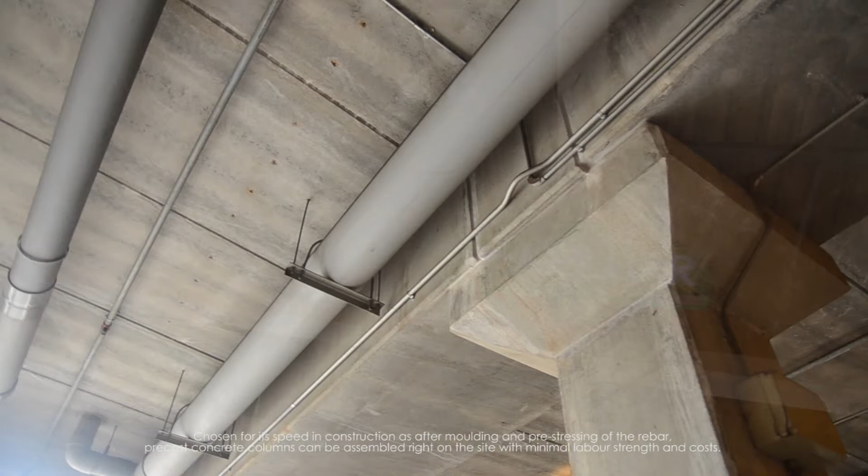Chosen for its speed in construction as after molding and pre-stressing of the rebar, precast concrete columns can be assembled right on the site with minimal labor strength and costs. Sizes of the columns can be preset into various sizes that are needed.

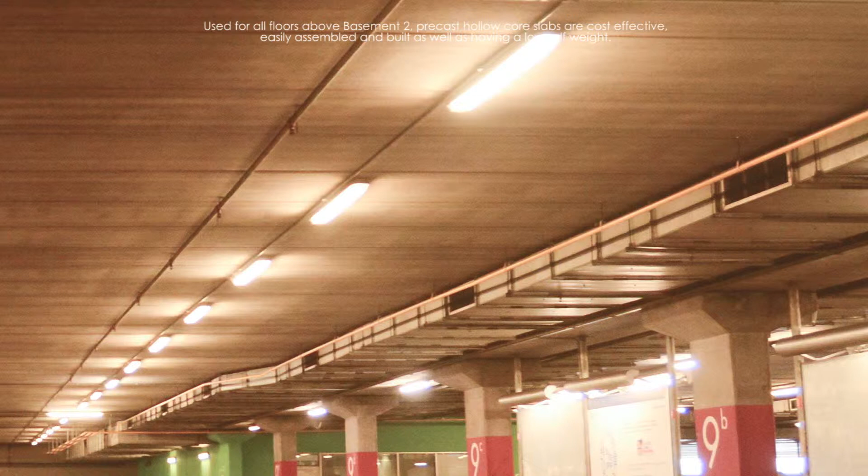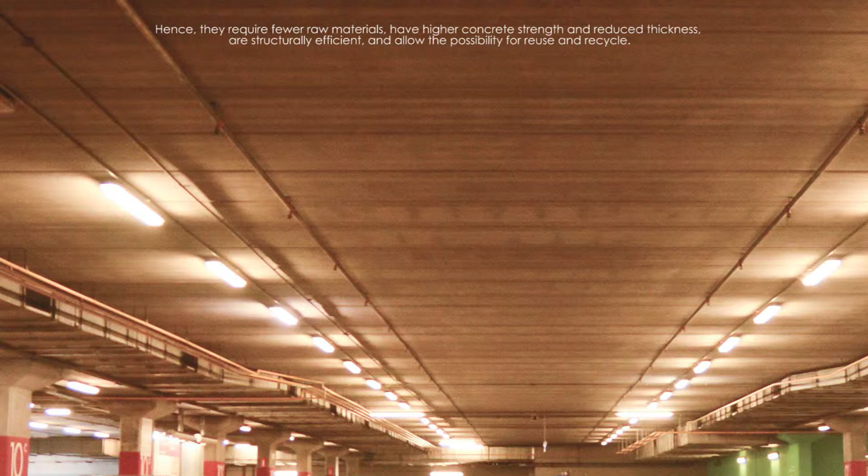Used for all floors above basement 2, precast hollow core slabs are cost-effective, easily assembled and built, as well as having a low self-weight. Hence, they require fewer raw materials, have higher concrete strength and reduced thickness, are structurally efficient, and allow the possibility for reuse and recycle.

Precast hollow core slabs are widely used due to its heavy weight capacity, exceptional fire resistance, lower self-weight, good acoustics and thermal insulation, cost-effective construction solution, design flexibility, and many more.

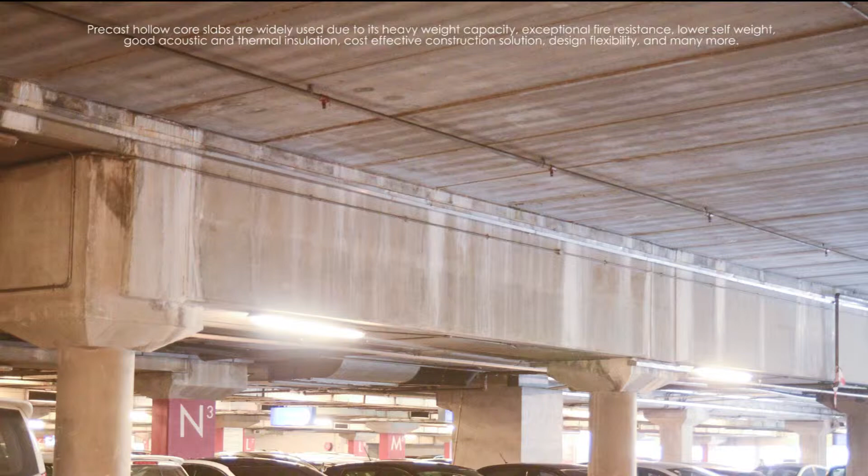The basement level of the IKEA store is made up of reinforced concrete flat slabs. Floor slabs are cast in situ with reinforced steel bars, which is known as rebars, as reinforcement and formwork, after which concrete was poured into the formwork and left to dry. Thanks to its ease of construction, reinforced concrete flat slabs are a popular choice in industrialized building systems. These slabs do not need grouting in order to combine them together.

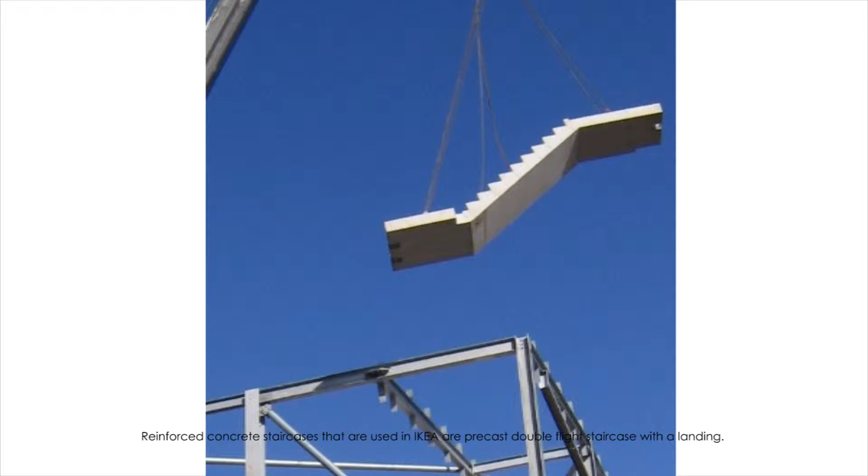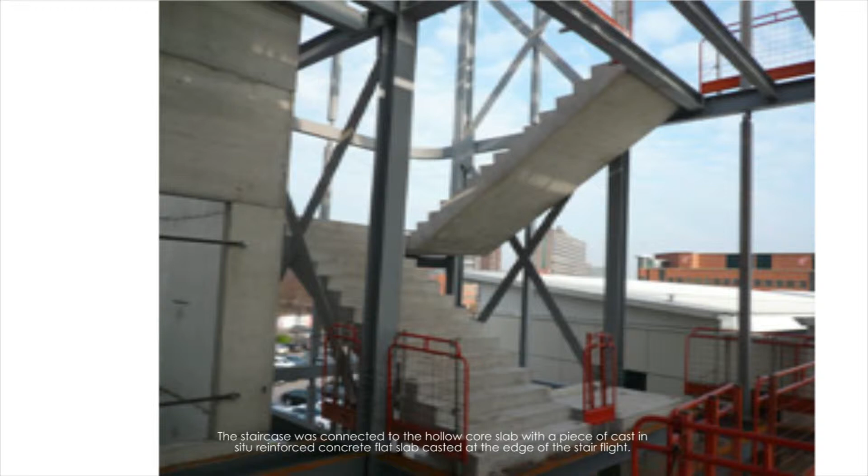Reinforced concrete staircases that are used in the IKEA store are precast double flight staircases with a landing. The staircase was connected to the hollow core slab with a piece of cast in situ reinforced concrete flat slab cast at the edge of the stair flight. This type of staircase was chosen for IKEA as it requires little assembling time.

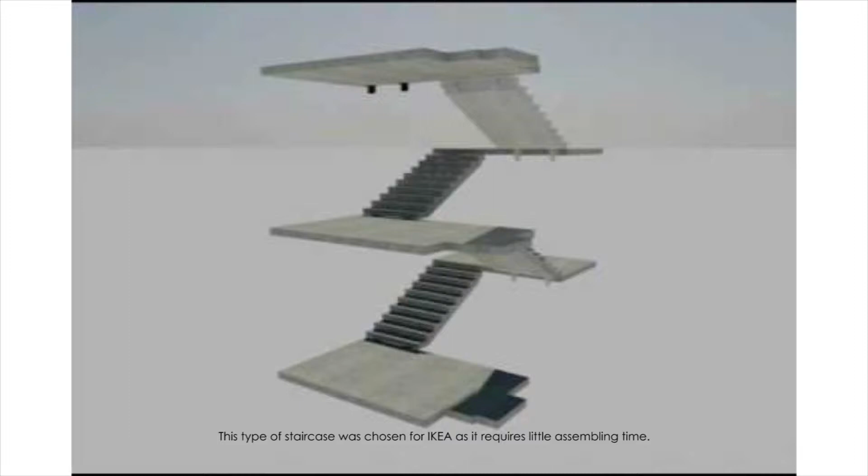Also due to its easy and fast assembly, precast steel roof truss was used for this building, as it is lightweight for transportation. Steel members of the roof truss were pre-made off-site, while the individual parts are bolted and welded on-site after transportation.

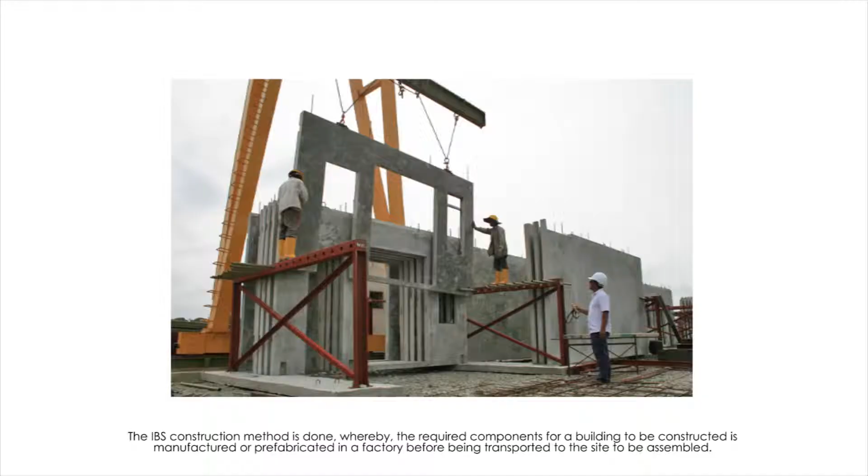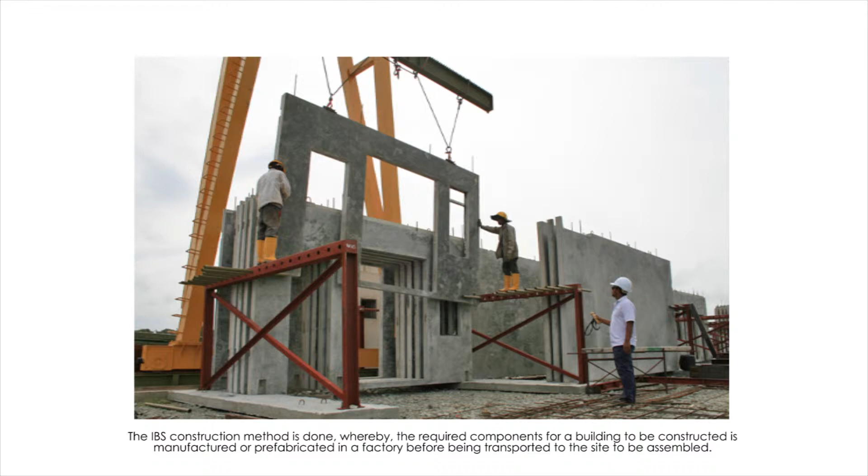The IBS construction method is done whereby the required components of a building to be constructed are manufactured or prefabricated in a factory before being transported to the site to be assembled. The advantage of the IBS is that it speeds up the process of construction and at the same time it reduces the overall cost of the project.

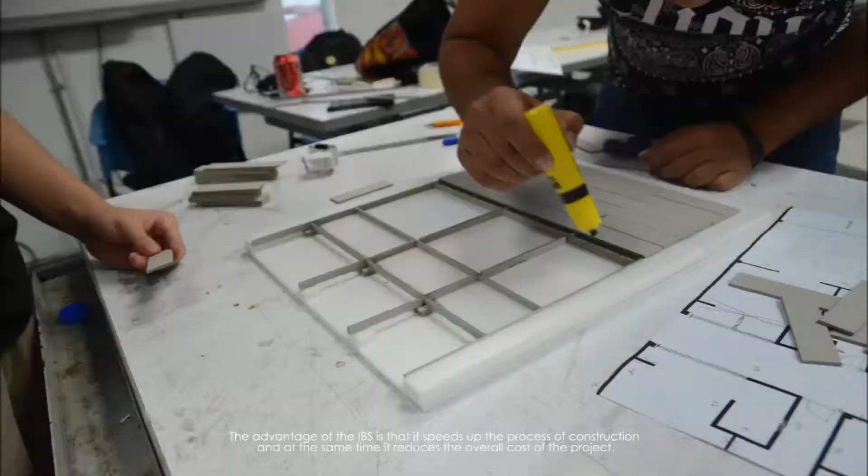The building that we use to demonstrate the example of construction using IBS components is Rose Bay Apartments, located in Sydney, Australia. This building uses the traditional method of building construction. We have modified this building in order to show the construction of this building using prefabricated concrete components.

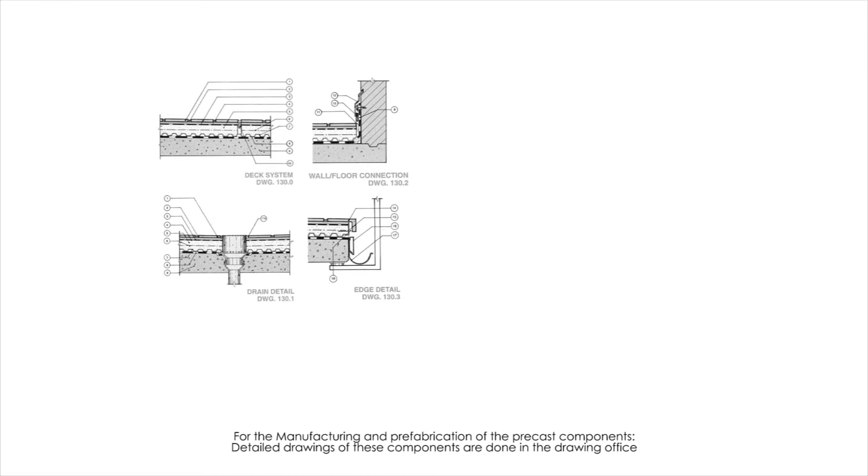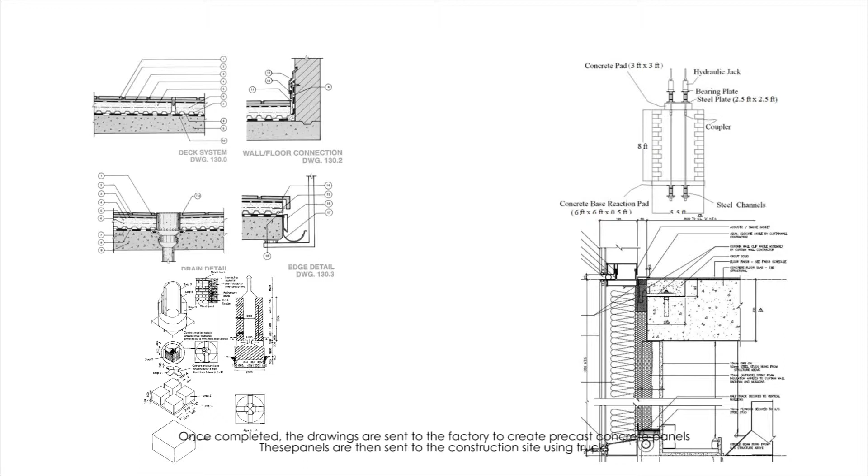For the manufacturing and prefabrication of the precast components, detailed drawings of these components are done in the drawing office. Once completed, the drawings are then sent to the factory to create precast concrete panels. These panels are then sent to the construction site using trucks.

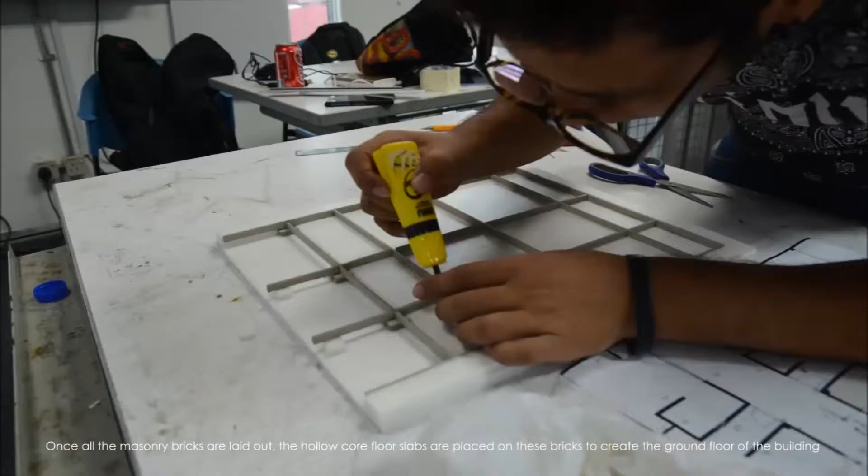For the foundation of the apartment, the IBS construction begins by laying out two layers of masonry bricks along the layout of the load-bearing walls. Once all the masonry bricks are laid out, the hollow core floor slabs are placed on these bricks to create the ground floor of the building. After all the slabs have been laid out, gaps between these floor slabs are closed using a layer of cement which serves as an adhesive to help prevent leakages.

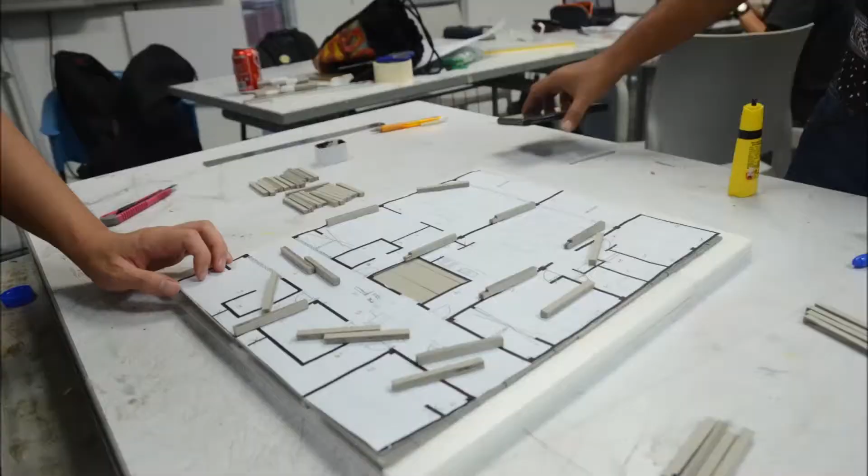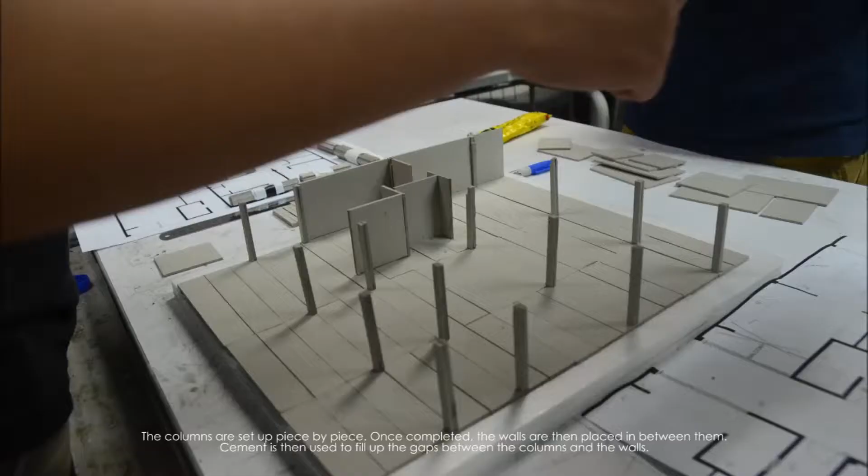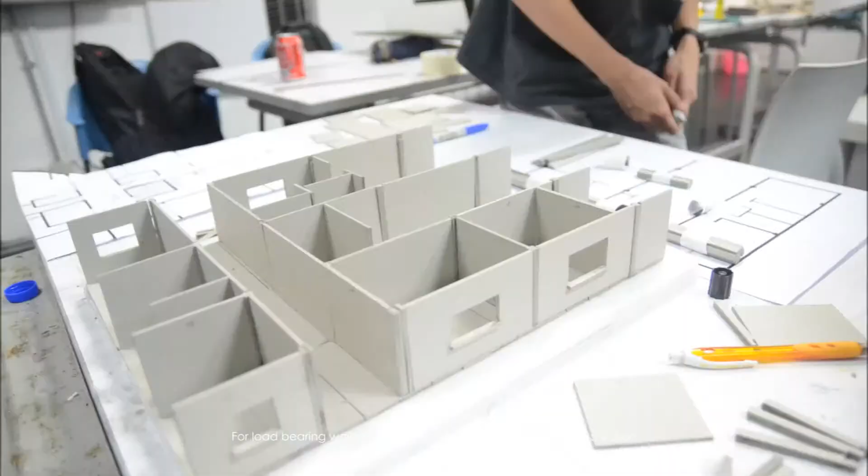After the floor slabs are completed, precast columns are installed, which is then followed by the precast walls using a crane. The columns are then set up piece by piece. Once completed, the walls are placed in between them. Cement is then used to fill up the gaps between the columns and the walls for the load-bearing walls. Concrete of grade 35 with the ratio of 1:3:5 is used.

Once all the walls and columns are installed, the beams are then placed on the walls and columns to provide support for the weight acting on the ground floor.

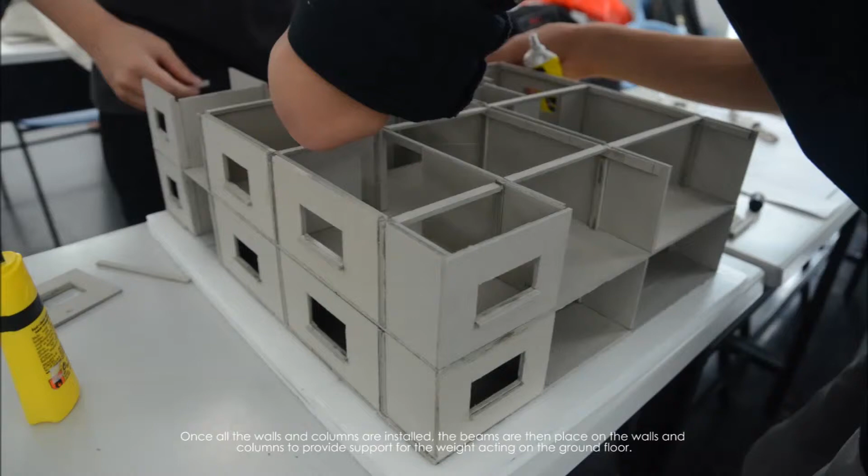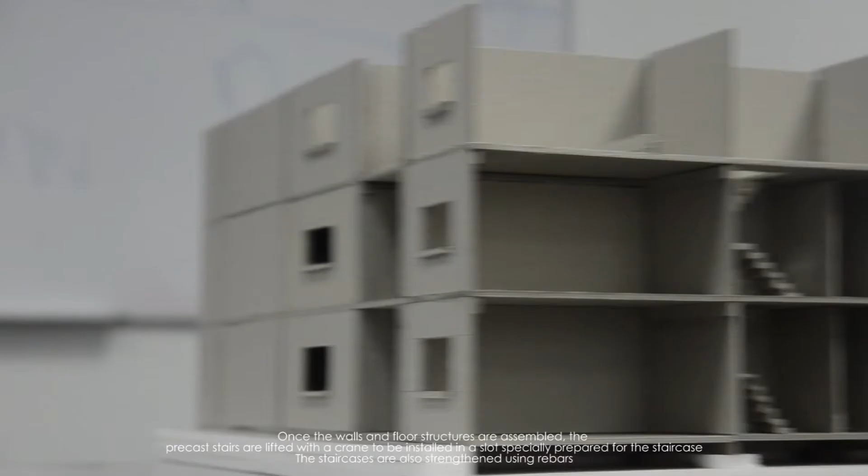Staircases are made of precast concrete in the factory before they are transported to the site for installation. Once the walls and floor structures are assembled, the precast stairs are lifted with a crane to be installed in a slot specially prepared for the staircase. The staircases are also strengthened using rebars.

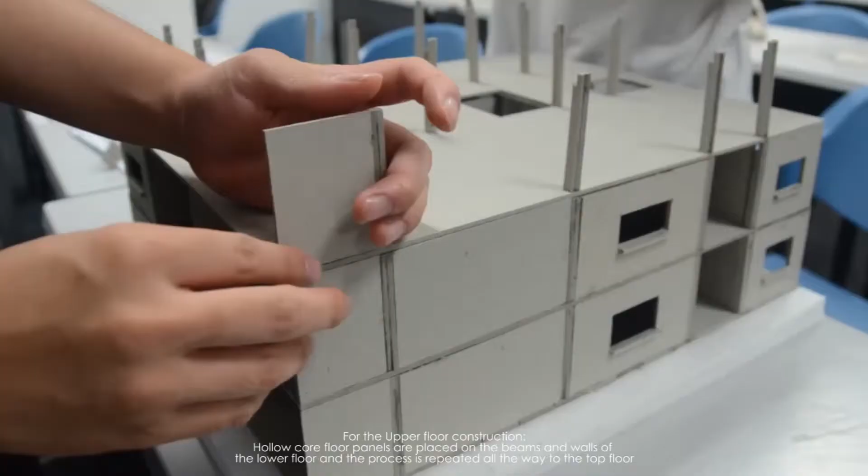For the upper floor construction, hollow core floor panels are placed on the beams and walls of the lower floor, and the process is repeated all the way to the top floor. Hence, through the IBS construction method, construction is fast and smooth with little issue.

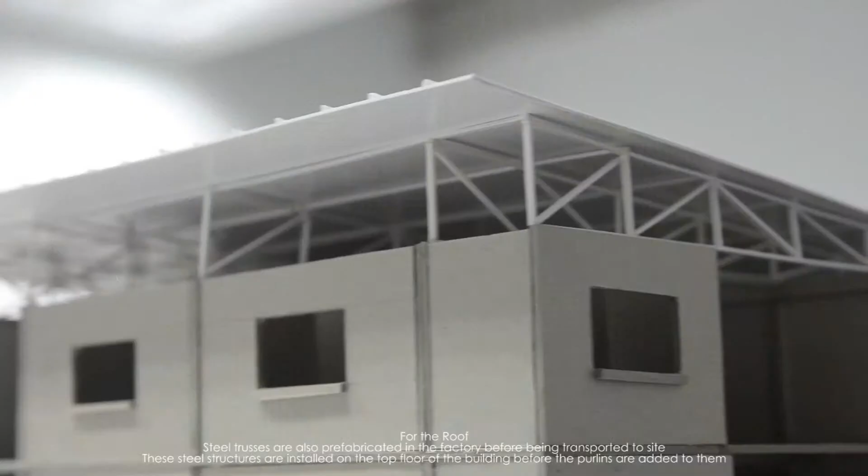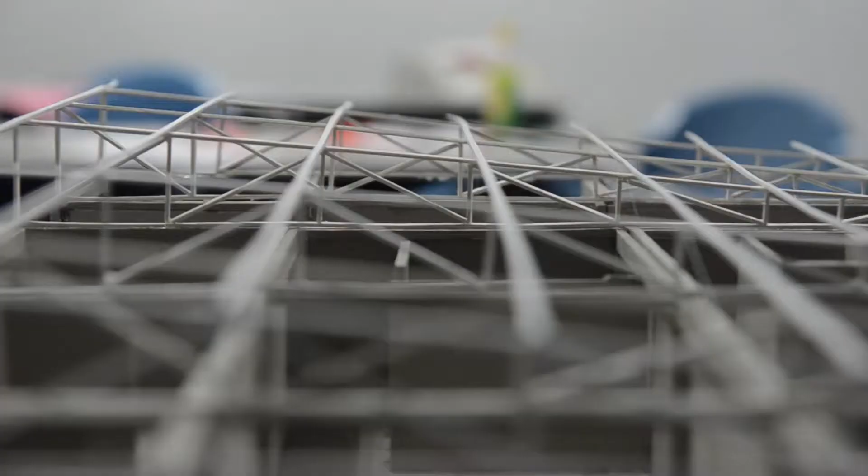For the roof, steel trusses are also prefabricated in the factory before being transported to site for installation. These steel structures are installed on the top floor of the building before the purlins are added to them. After that, the galvanized steel roof is added on top of the trusses and purlins, thus completing the construction of the building.

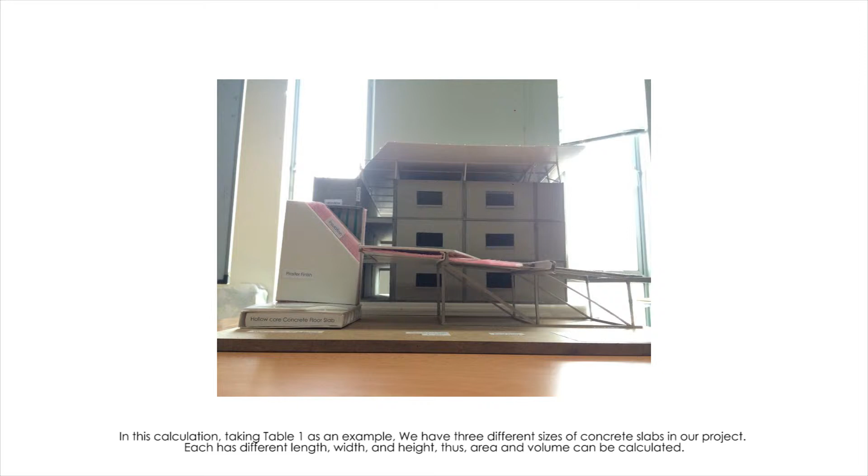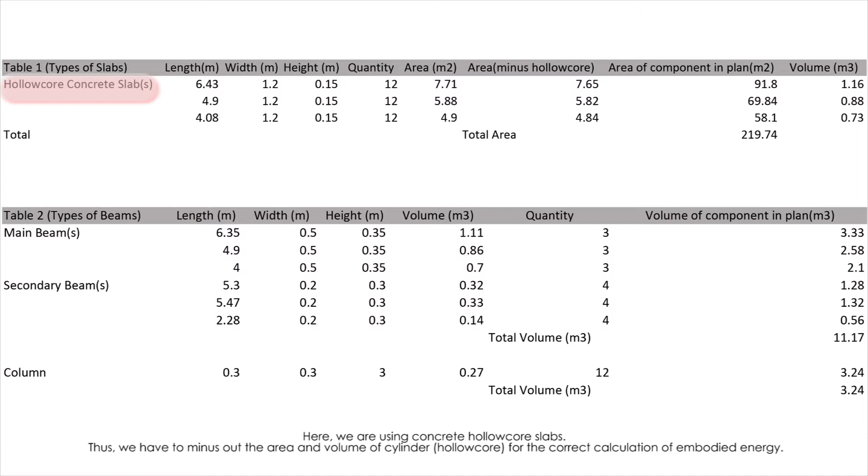Embodied energy is the energy consumed by all of the processes associated with the production of a building. In this calculation, taking table 1 as an example, we have 3 different sizes of concrete slabs in our project. Here, we are using concrete hollow core slabs. Thus, we have to subtract the area and volume of the cylinder, which is the hollow core, to calculate their embodied energy. Total area and volume are calculated according to the number of each type of slabs.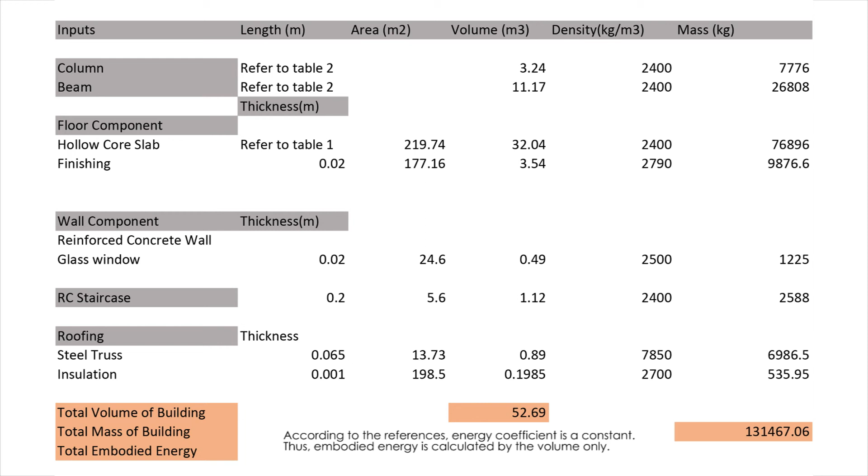Density of concrete slab is taken from the lecture slide and from the reference book. Thus, mass of concrete slab can be calculated by the following formula. According to the references, energy coefficient is a constant. Thus, embodied energy is calculated by the following formula.